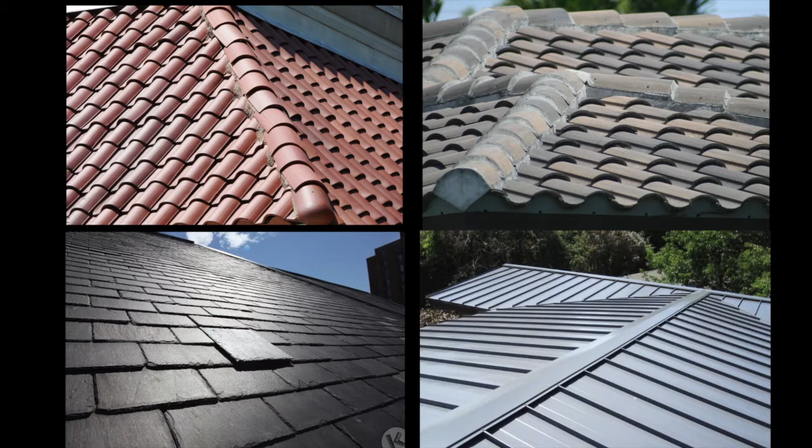Clay, concrete, slate, and metal roofs are environmentally friendly alternatives to asphalt shingles and are more financially beneficial in the long run. So if such alternatives exist, why did asphalt shingle roofing become incredibly popular and dominant in the roofing industry? Well, asphalt shingles didn't always have a short lifespan.

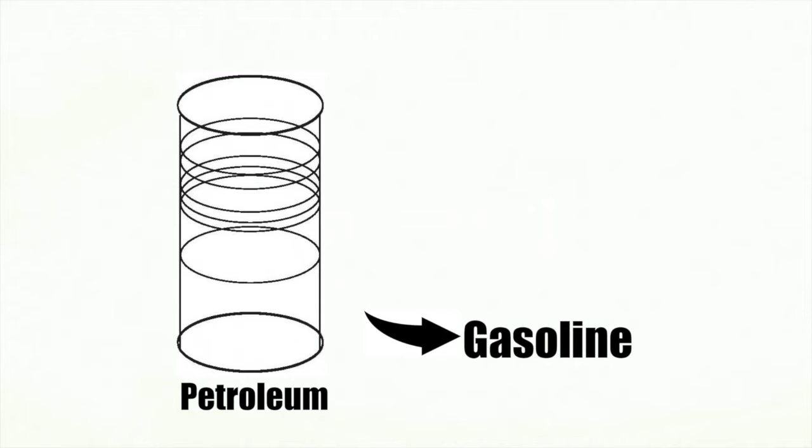An important component in asphalt shingles is, quite obviously, asphalt. Asphalt used to be incredibly cheap, even sometimes free, for companies to get their hands on. This was due to the old refining system of petroleum. Before the demand for gasoline was so high, and before refiners had the technology and knowledge to yield high amounts of gasoline from petroleum, the refining of petroleum would leave a lot of waste product.

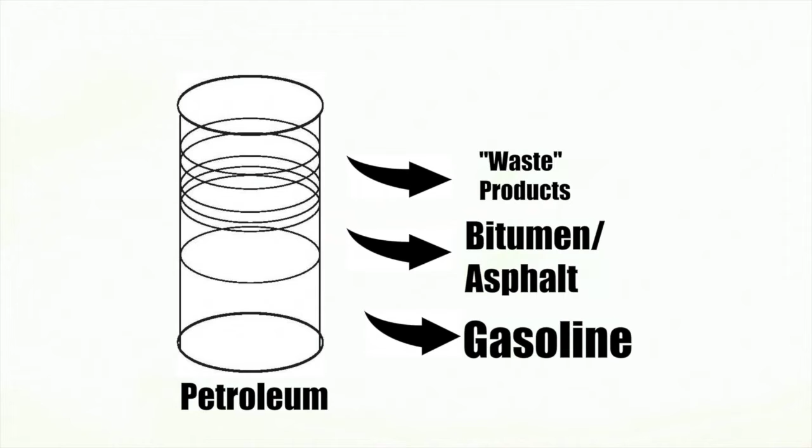This waste includes bitumen, commonly known as asphalt. Since this bitumen was simply a waste product of gathering gasoline, asphalt companies would get it for cheap. However, as the demand for gasoline increased, engineers designed improved refining processes to yield more gasoline from petroleum. Therefore, the amount of bitumen, or asphalt, produced was minimized drastically.

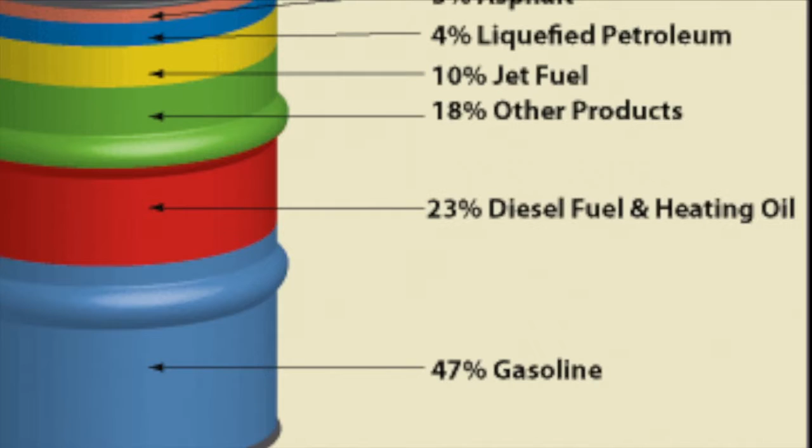Now that asphalt was no longer a convenient waste product, asphalt roofing companies have to resort to paying much higher prices for their material. One of the main reasons asphalt roofs became so popular in the first place was because they were an inexpensive roofing solution for consumers, so increasing the price of their product was unacceptable, and instead manufacturers altered the composition of their product. Let's back it up to the late 1800s.

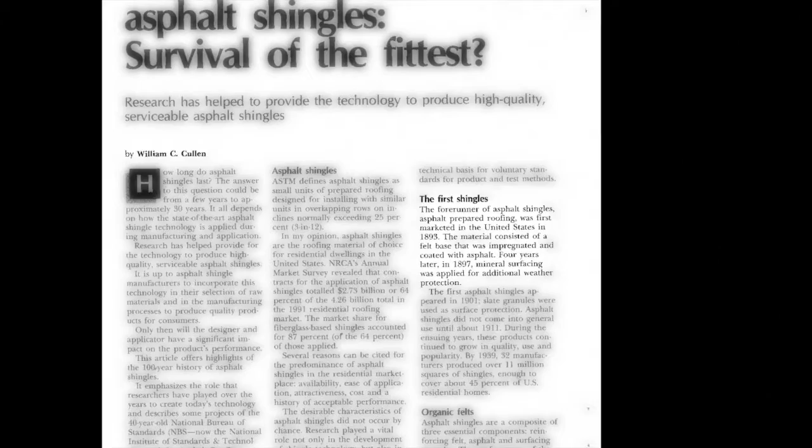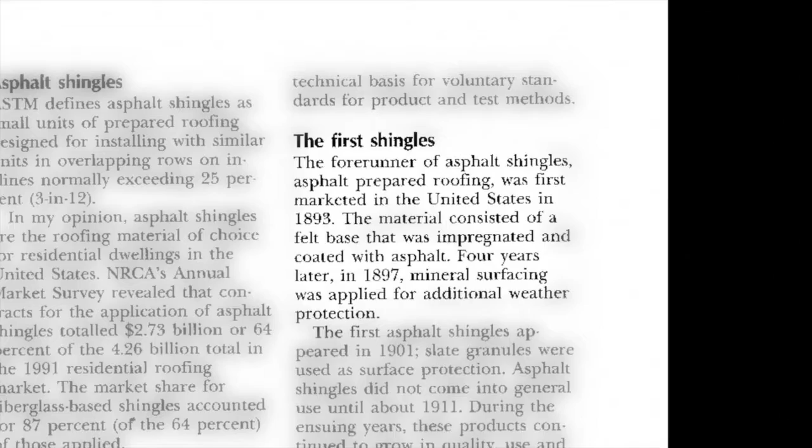Asphalt shingles were manufactured by taking a thick organic mat, cloth rags at first, later felt, then paper, and saturating it with asphalt. This mat would absorb a high volume of the asphalt perfectly. The asphalt-soaked mat would then get covered with a layer of stone coating for protection and weathering. These asphalt shingles were phenomenal and would easily last over 30 years.

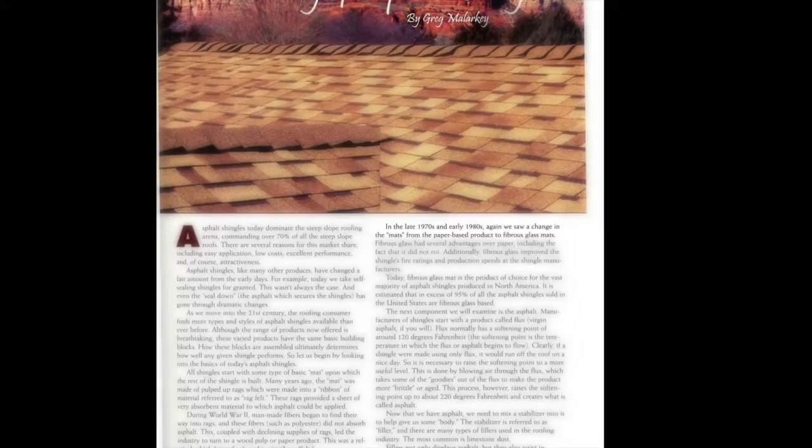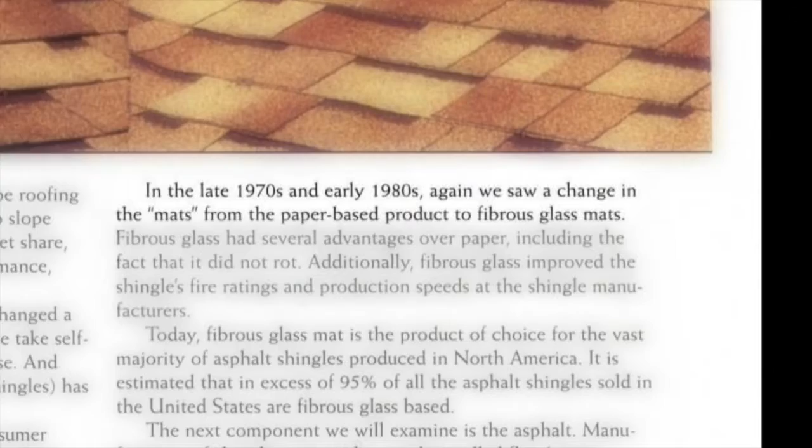In the 1970s, at the peak of the energy crisis, when even paper was too absorbent for the high cost of bitumen, manufacturers changed their base material from the absorbent organic mat to fiberglass mats. Unlike the organic mats, fiberglass doesn't absorb asphalt. Instead, the fiberglass mat is coated with a thin layer of asphalt. This allowed manufacturers to keep their prices down because significantly less asphalt was being used.

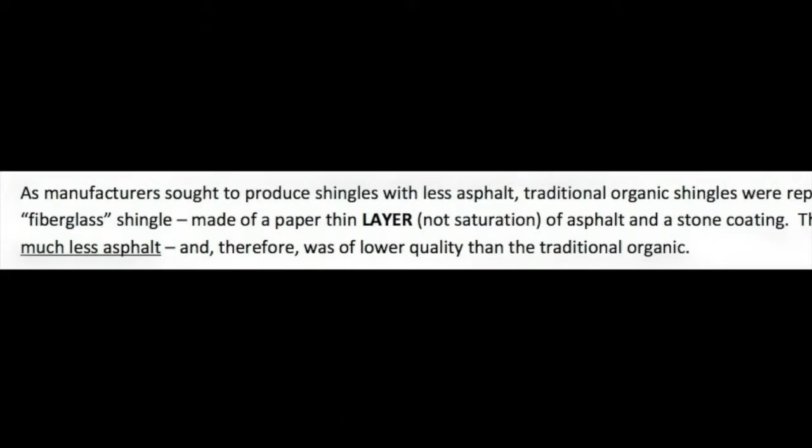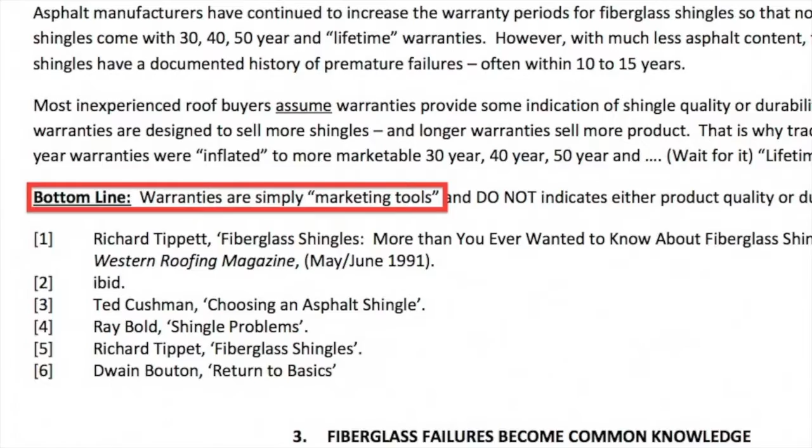It didn't take long for contractors and consumers to notice defective shingles that were sometimes taking less than 10 years to fail. Manufacturers started giving their shingles longer warranties. The same product that had a 10-year warranty all of a sudden became a 20 and 30-year warranty.

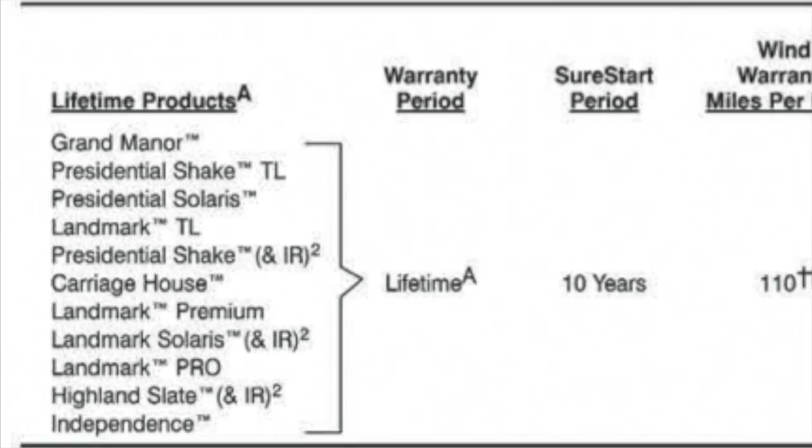Recently, in 2011, a trend of producing lighter shingles coincided with a trend of warranties starting from 50 years to lifetime. This was a smart marketing strategy because when people hear they are getting a longer warranty, they assume an improvement in their product has been made. In this case, the opposite is true.

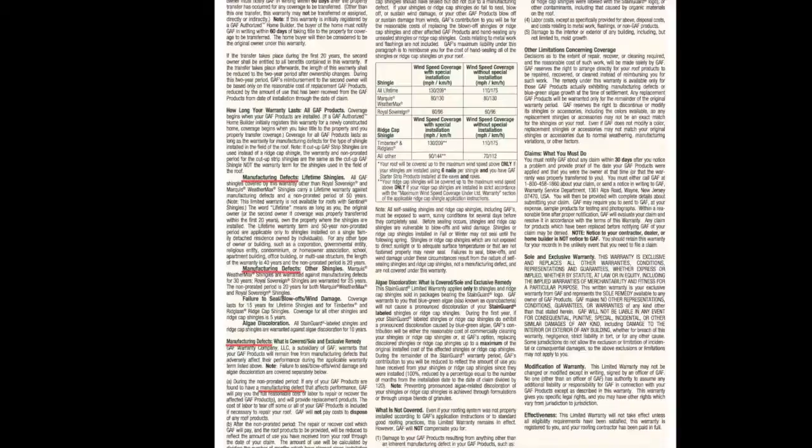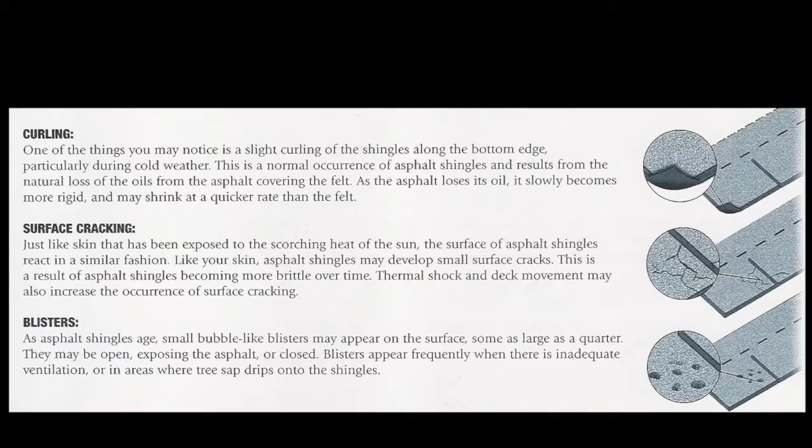But who cares about how long the shingles are going to last as long as it's covered under the warranty, right? Well, not necessarily. The majority of warranties issued by asphalt shingle manufacturers only have manufacturing defects covered. The tricky part here is that asphalt shingles are sold with the knowledge that natural aging defects are going to happen. These defects are not covered under the warranty, but are the majority of the defects that customers complain about. These natural signs of aging are simply happening much sooner with fiberglass shingles.

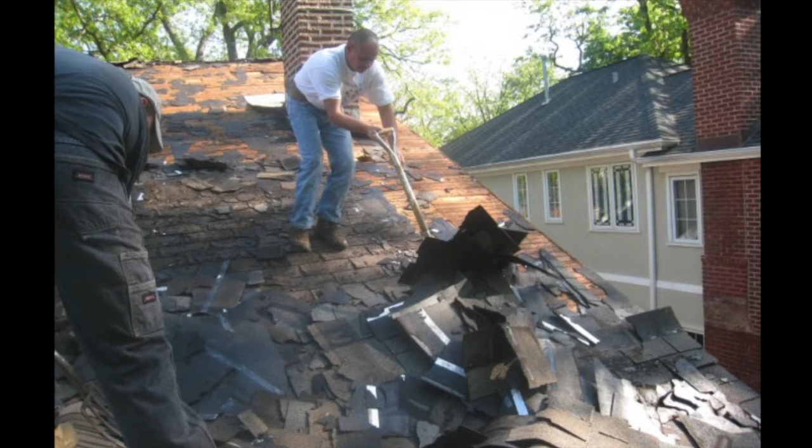With these roofs failing and needing to be replaced every 10 or so years, asphalt shingles are taking up around 11 to 13 million tons in landfills. Asphalt shingles were a truly great invention for their time. They were inexpensive, durable, and lasted a long time. However, now we have the knowledge to see that there are more efficient alternatives. America and Canada need to start following the rest of the world and stop installing disposable roofing.

Clay, concrete, slate, and metal are lifetime solutions to our disposable roofing problem, and they all have appealing factors. Clay is durable, has dyed-in colors that won't fade, and lasts over 75 years. The downside to clay, however, is that it is heavy and not all existing roofs are able to support the weight. Clay roofs are initially more expensive to install than asphalt shingles, but they make up for it in the long run.

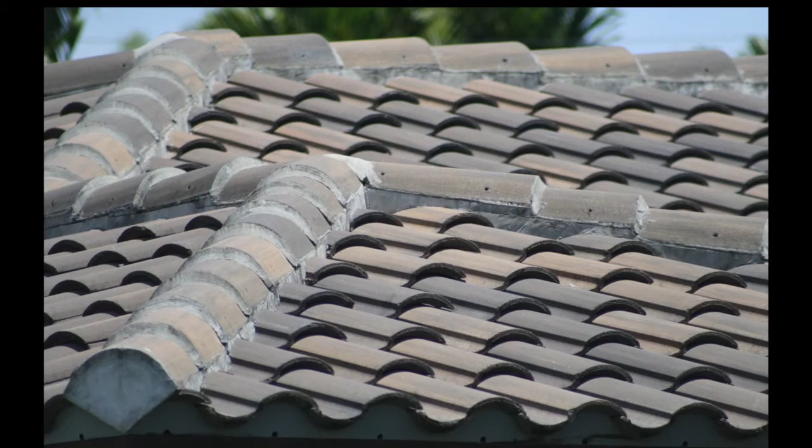Like clay, concrete is durable and lasts over 75 years. It is also heavy, but is half the price of clay to install. Slate is durable and lasts easily over 100 years. It is expensive and complicated to install, like clay and concrete, but more than makes up for it in life expectancy.

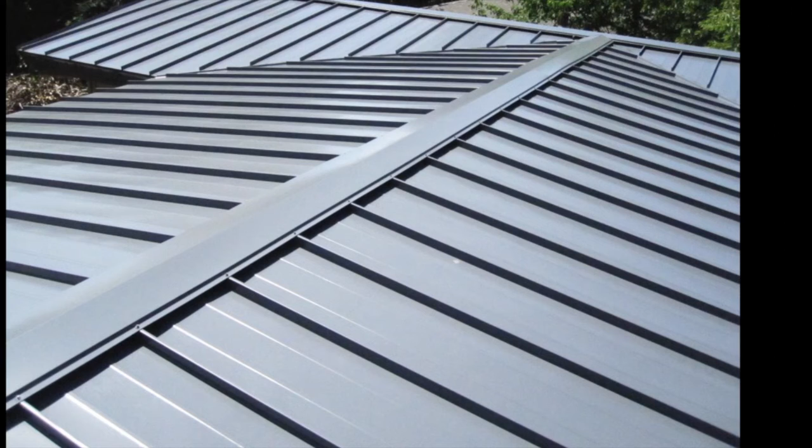Like the other three alternatives, metal is expensive to install but lasts a lifetime. It is the lightest of the four and can be installed directly over an existing asphalt roof, reducing landfill waste even further. The decision between these four alternatives to asphalt roofing is yours.